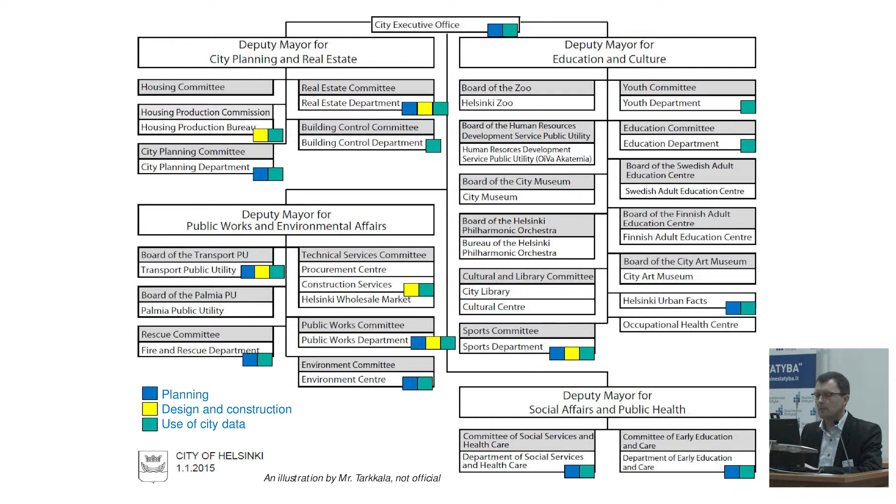The organization of the city is very complex. We do a lot of planning in several places. And as I am an engineer, I'm a purist when I talk about building information modeling, so it is not the same as city models. In the city planning department, we do planning and we use data in many ways, but design and construction are taken care of by different organizations.

We have main products, not only city planning, but also transport planning. I am not going to talk about transport planning today. The main product in city planning is the detailed city plan. Typically it is a CAD file that has structured information. Before it was only a CAD file and all the vital information was transferred manually, but nowadays there is a structure and a lot of information goes automatically.

Then we have master plans. We have several of them under work today. They are mapping files and they include information about the area density, the land use, number of residents and shops. But what will be approved by the city council is only the layout, the graphical illustration, in both these cases. So we have a lot of data, but only the visual content will be approved.

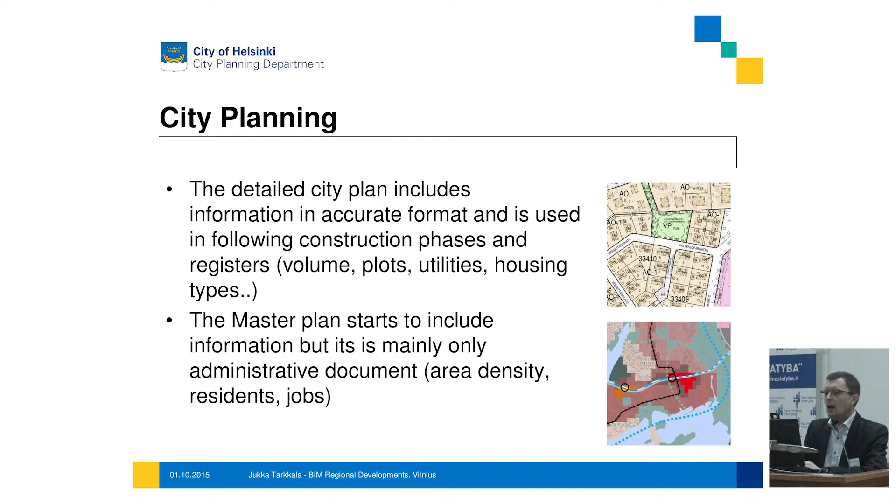Today, and say for the last 5 years or so, we have had a system that was provided by Bentley. It works on a ProjectWise environment. We call it common data environment. It is some kind of project bank. We have 300 active city planning projects going on at the moment.

And there is structured information. We use that also for the operation of the city planning department. We use reporting, and then we follow the budgeting, monitoring of the working hours and so on. But then there are also automatic connections to the national level registers. And then inside the city we have a municipal server for our civil servants, so we get very fast information on what's going on.

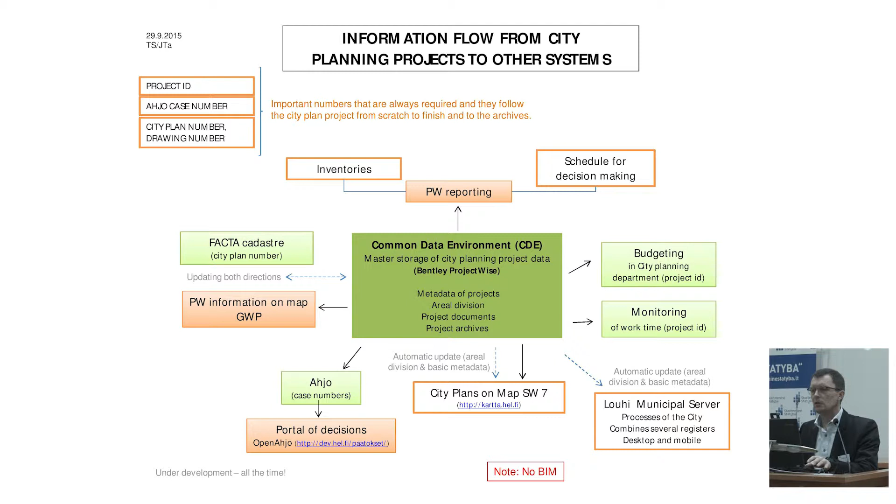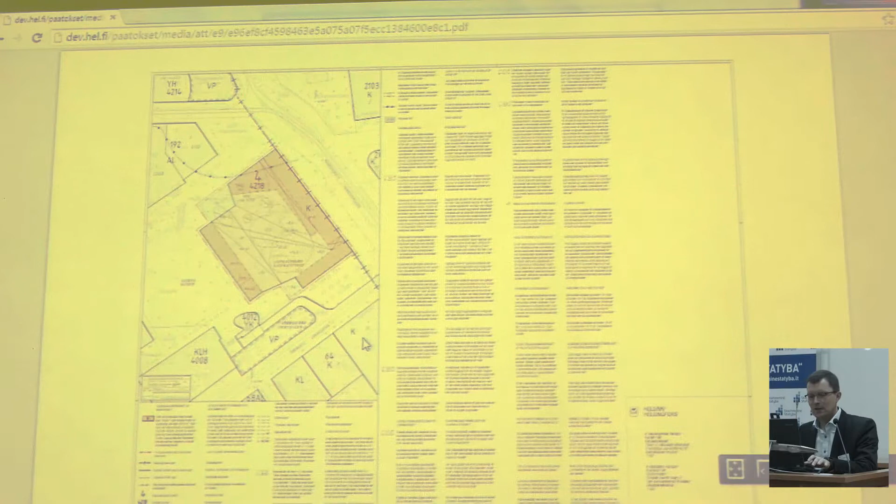But this is also because of the openness. This is also for the public. So this runs on the internet, and I'm sorry it is in Finnish, but for instance, if we take a look at which are the decisions. Oh, accidentally I found a very interesting plan. I will come to this later. But due to openness, this is important, and also what we are working on at the moment is visible to the public. In planning, we are preparing these city plans.

And then we have detailed master plans. But of course, we have a master plan revision for the whole of the city at the moment as well. But I wouldn't call this BIM. There are many ways to do work, and we have the stages of city planning here. We start from the left, and in the city planning department we take care of the material until it goes to city council.

After that there are other people taking care. And of course all the work is done with the computers, but the way of working is pretty old. So we transfer information manually to many places and many times. So there's a lot of databases, there is a lot of information, but it requires manual stages.

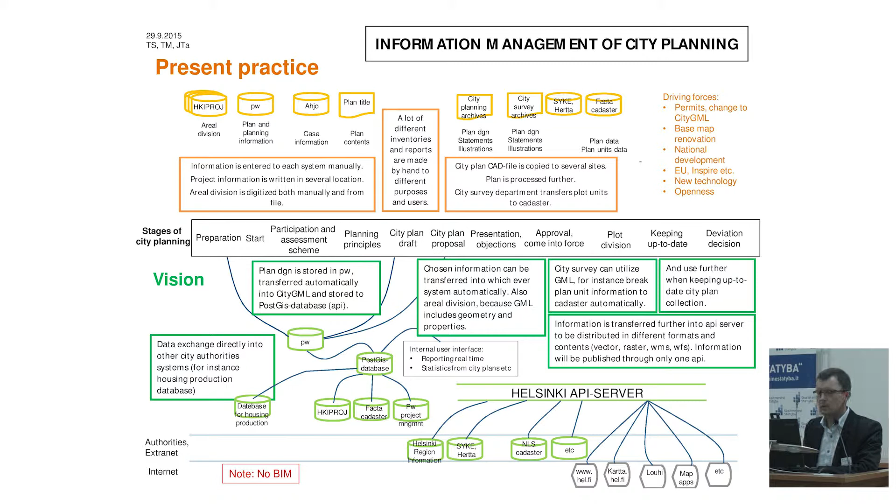But the vision that is very close is semi-automatic. So here we have that ProjectWise environment that I described here. And the work in the city will be based on that, and we can also exchange information through the application programming interface to different authorities and also to the public. So this is a good way of working, but of course it is not BIM.

But this is BIM. So this is an illustration that I made for this seminar of our city rail, of one part of our city rail loop plan. So the city plan is very simple. It's a two-dimensional CAD drawing. We have reservations. For instance, here is the present tunnel, and then there will be a new tunnel because there is a collision in here.

We have rough models of existing utility tunnels. In this there are 3, and this is an underground garage that is under construction now. We made that model a few years ago when the city plan was prepared there. And then we have this railway plan. There are some parts.

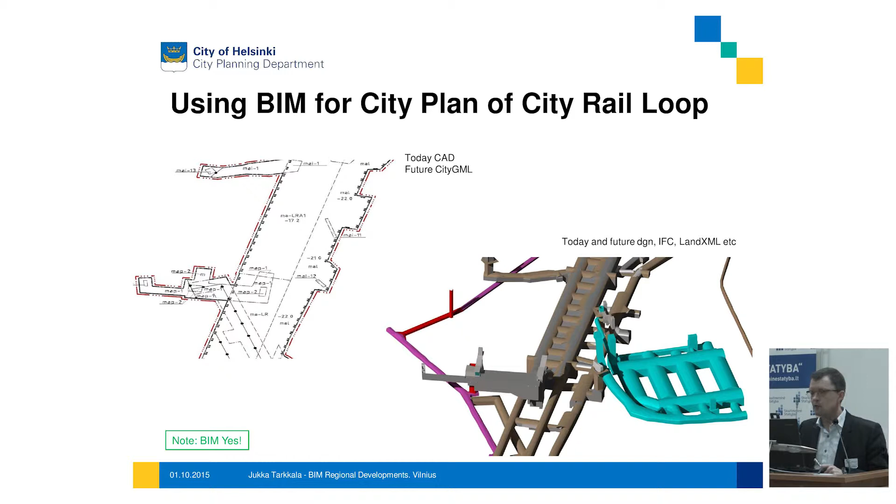So there is a collision in here. It is not a collision, we just combine the functions, and that must be done precisely. And this is BIM. But there are only a few city planning projects where we use BIM, full BIM, at the moment.

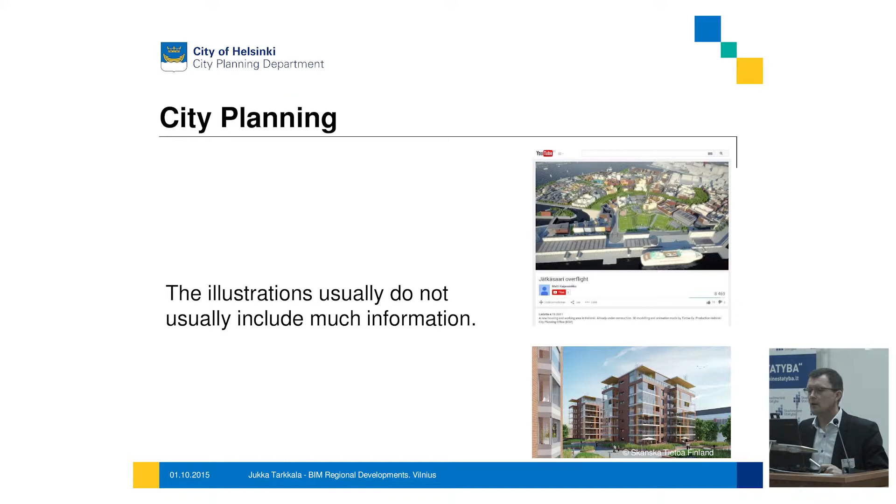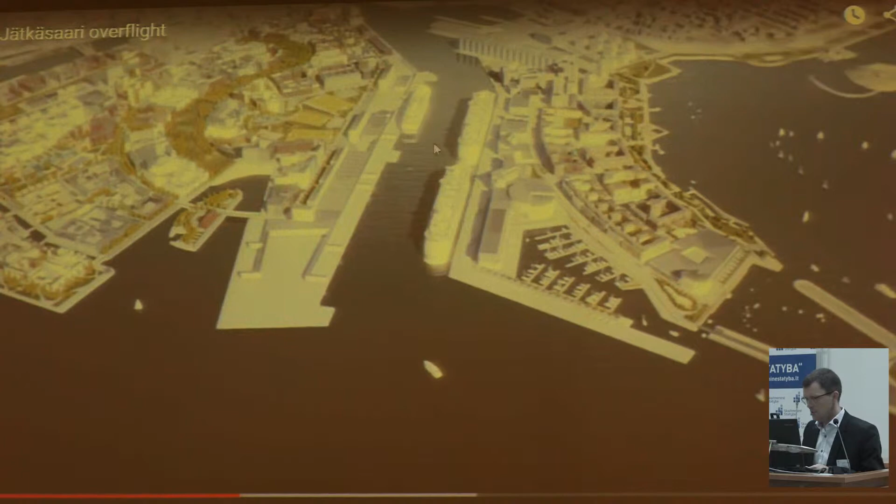The illustrations that we produce normally, they don't include very much information. These are done for the decision making. They show what is the layout of the city plan, which are the functions. And for instance here we have a large passenger harbor. This area is under development now, and this is an old storage and harbor area that will be developed later, but in the near future.

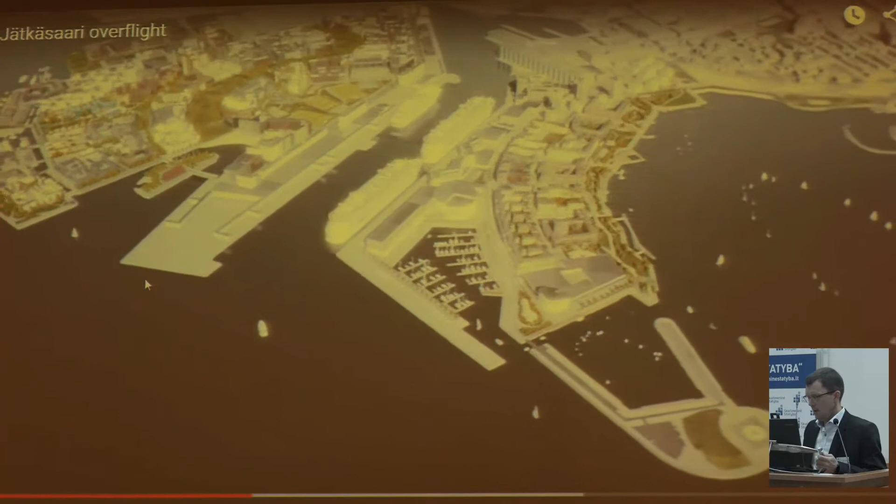So this is also a problem. We have great projects, but how to update? We have already constructed, say, 20 new buildings in this area. How to update that data to the city information?

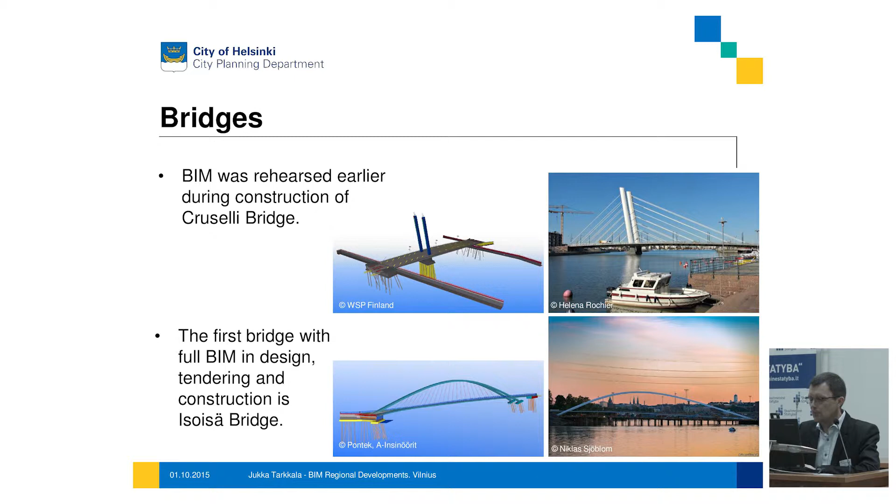Of course, these are the typical uses of BIM. So the bridge above, it has been open for 4 years now. There was a rehearsal of using BIM in the construction, but later this year they will open the lower bridge. That is a grandfather's bridge, and that is the first large bridge with full BIM from beginning to the end. And of course, the major renovation projects in the buildings that are owned by the city are done with BIM.

And the renovation of the Olympic Stadium and extension of the spaces will start in a few months. I hope there is new room for basketball also.

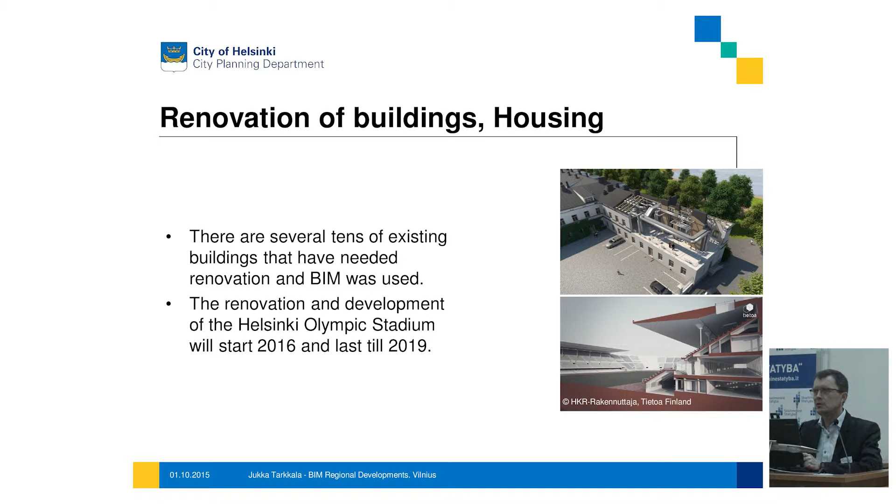But as you know, it is not only the visual appearance of the city that is important. We must combine a lot of information there. So the platform must be multi-purpose. So we can join cadastre and data about the population and jobs and traffic and so on there. So the work is going on at the moment. There are pilots. I don't know which they will be, but I will hear about them very soon.

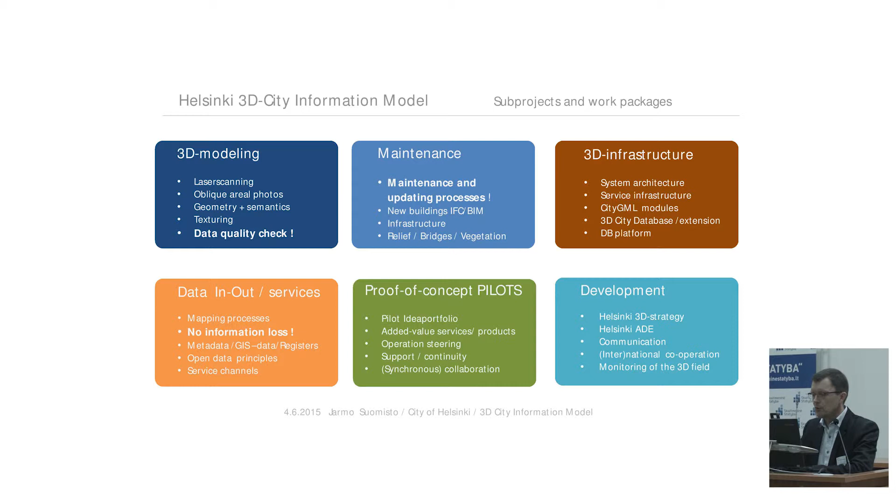And the work packages that are included in this development can be divided into these 6 boxes. There is nothing new in these. We have all noticed these lines before. It is only how do we combine these into one format so that we don't have separate projects, but we have them together supporting the functions of the city.

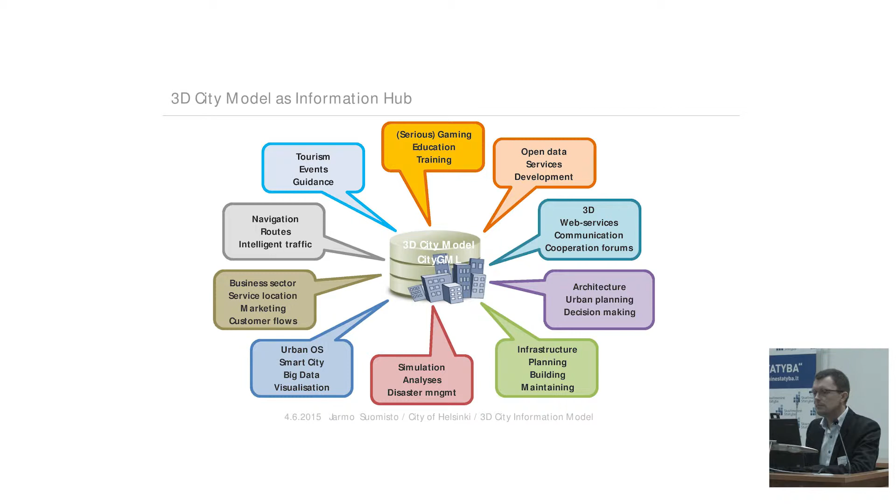Here are our normal everyday activities. But as you can see, this city model planning work. So at the moment we have a terminal railway station in Helsinki, and then we have another existing station here, and all the railway traffic to Helsinki goes through these. We have designed the loop with 3 new underground stations.

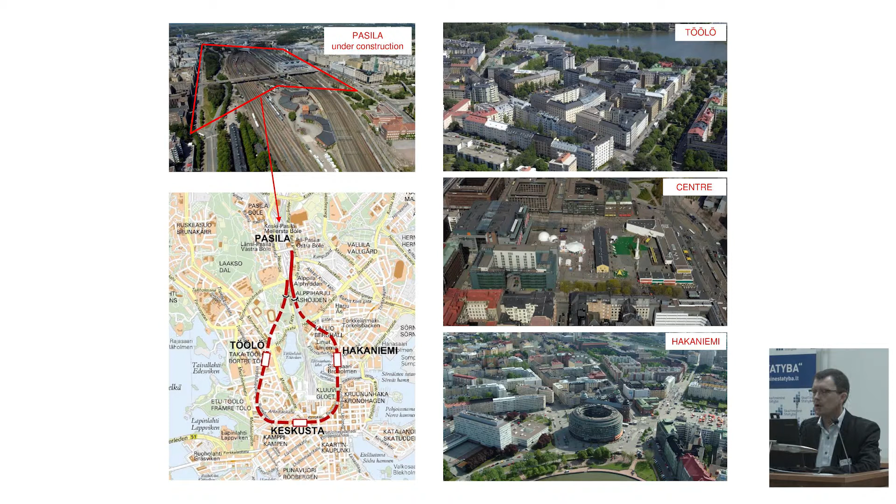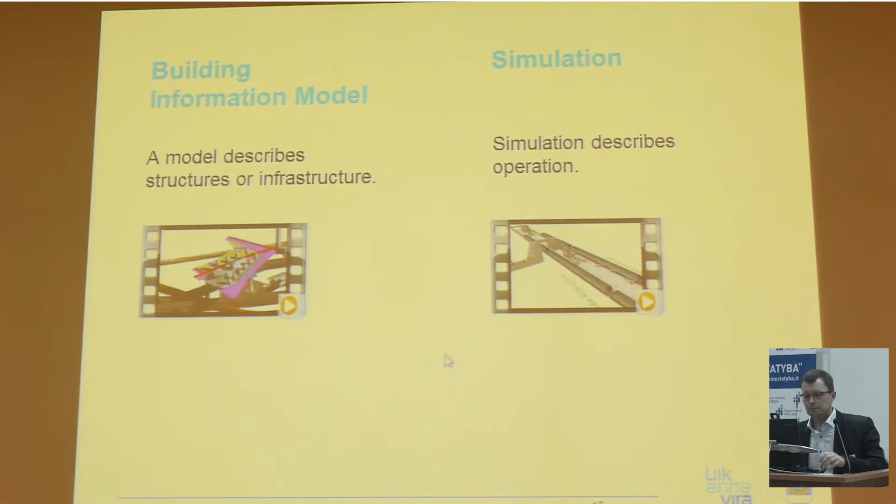Here at the Pasila area, the construction is going on at the moment. A few days ago it was like that, but here the stations will be underground and not visible. So we have done a lot of information modeling, for instance, for the entrances. And then we have done a lot of simulations, for instance, for passenger and pedestrian analysis.

Initial data model, that is the city model of today. We have all these in computers, in files. They are in several sources, a lot of information that we have combined for this project into one database. So normally we have a lot of databases in use, but for everyday practice we have to simplify it.

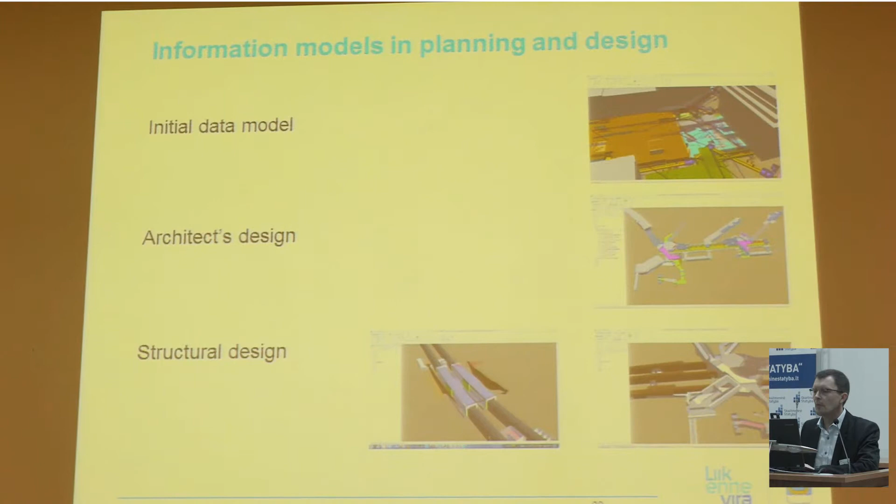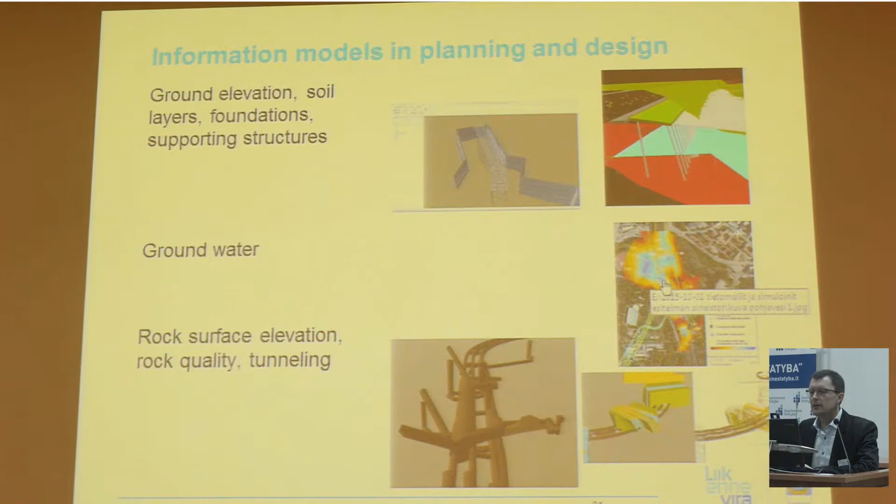This is the existing metro, existing underground spaces here, sewage tunnels, cables, and so on. We have this empty plot here for the railway station. During the design, we have made models of temporary structures also. This is the empty plot that I showed a moment ago. We have to decide in advance what is the structure, and then we have to decide in which stages we are going to construct it.

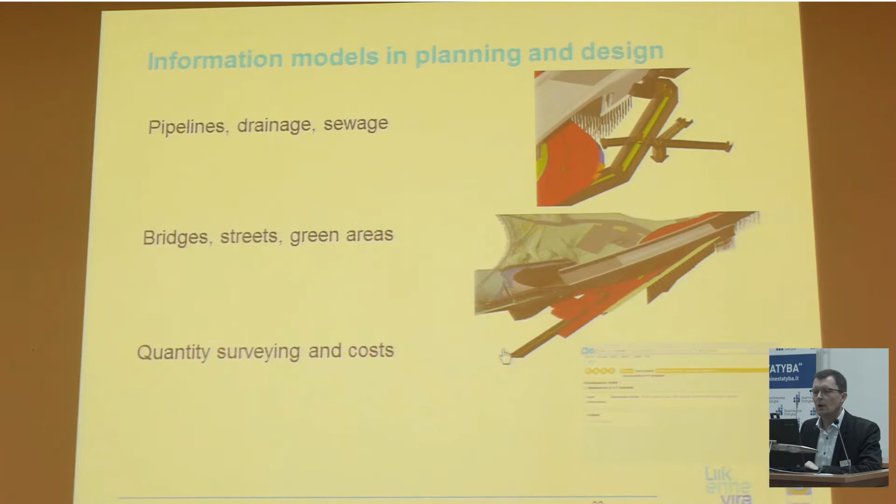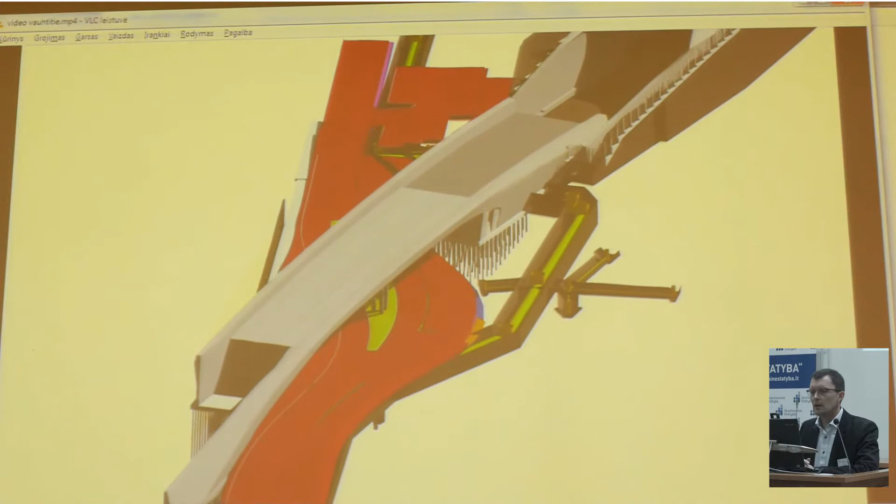So there is a temporary tram bridge. And also we have one major overground bridge. It's here. Then we have several underground bridges in the tunnels. The space that is needed for ventilation, smoke exhausters, and that kind of technique, it's immense.

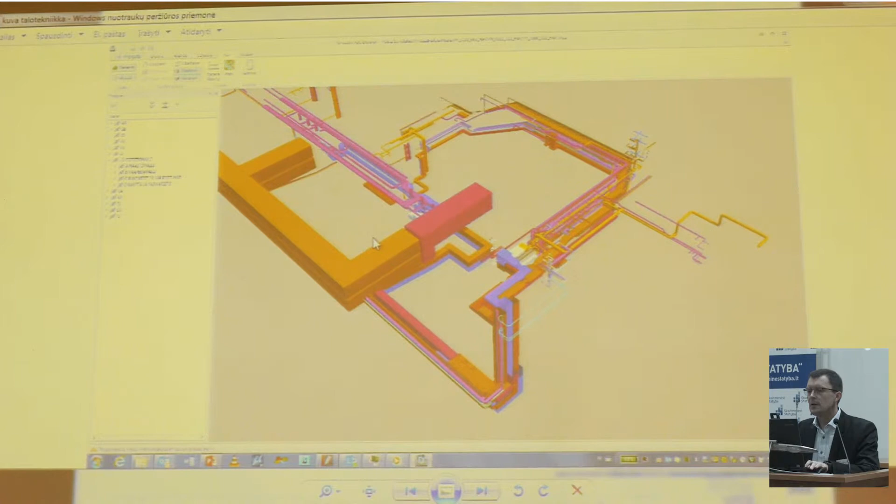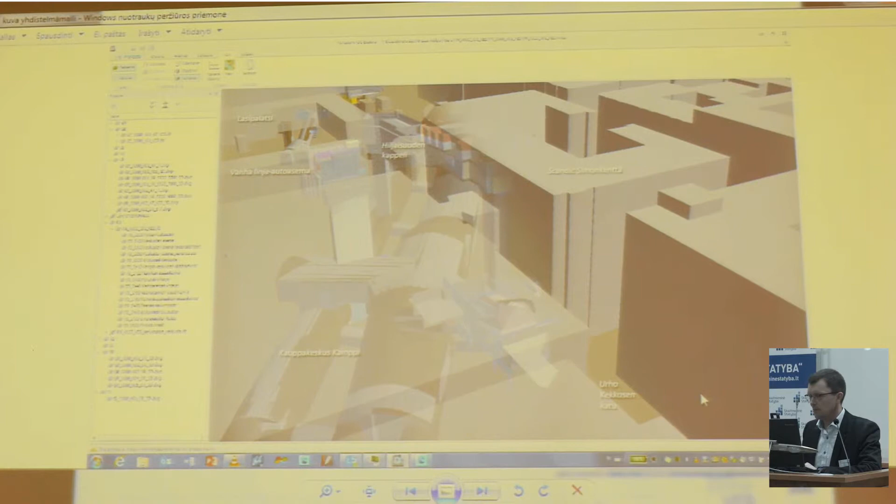And after all this modeling, the combination model, it is very heavy, it is large, it's too complicated. That is a problem. If you have a large project, then you have too much information for a single person. So BIM gives very good support to that. You can use only that information that you need.

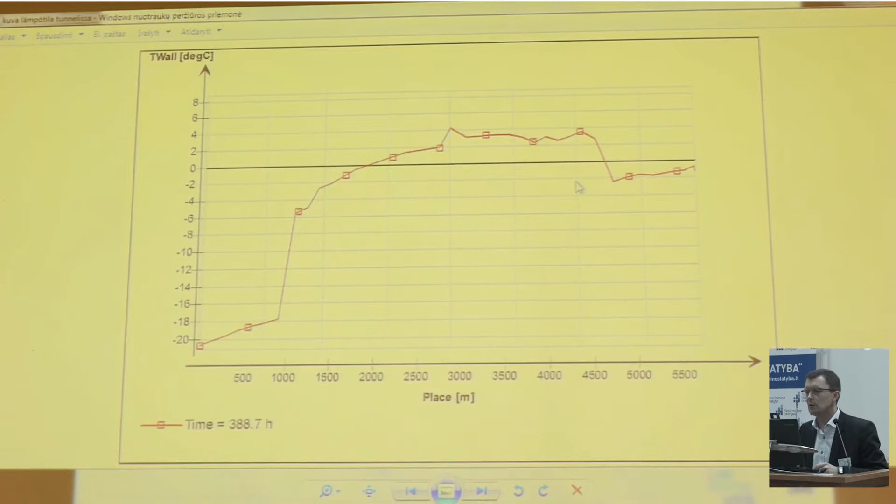Of course, the simulations, there's a lot of them. For instance, in Finland, it can easily be -20 or -25 degrees outside in Helsinki. So the cold air goes to the tunnel and the train pushes it forward. So for 2 kilometers the tunnel walls will be freezing. But in the middle of this 6 kilometer long tunnel, it will always be in the plus degrees.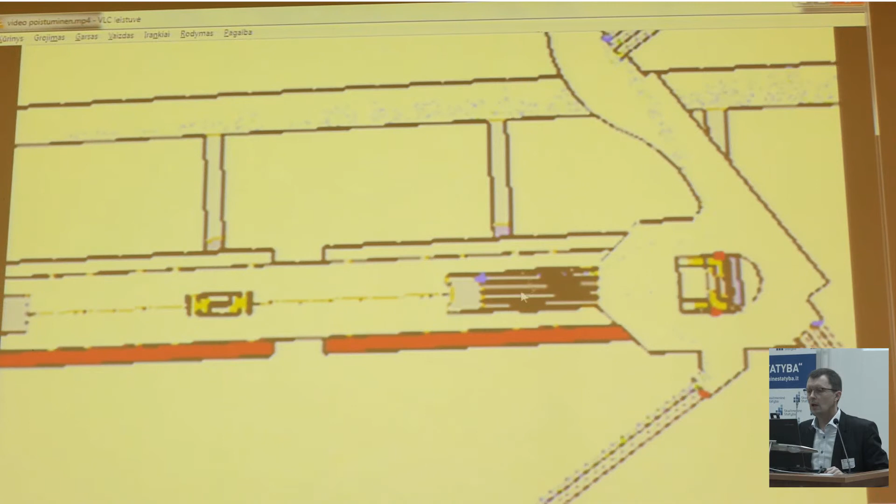So I already showed the pedestrian simulation, but there are also, if there is an emergency in a train, for instance here in the red train, the passengers from the station are safe in 3 minutes, and in 10 minutes the whole station is empty. So there is a rescue and service tunnel besides the railway tunnels, and the entrances can also be for rescue purposes.

This is the most important slide for me, because the population and the number of jobs in the Helsinki region is increasing. So which will be the number of passengers in the trains that are red and in the metro lines that are yellow. It describes only the public transport. There are also tram lines and then the bus lines here. But as you see, railways are the most important ways for public transport.

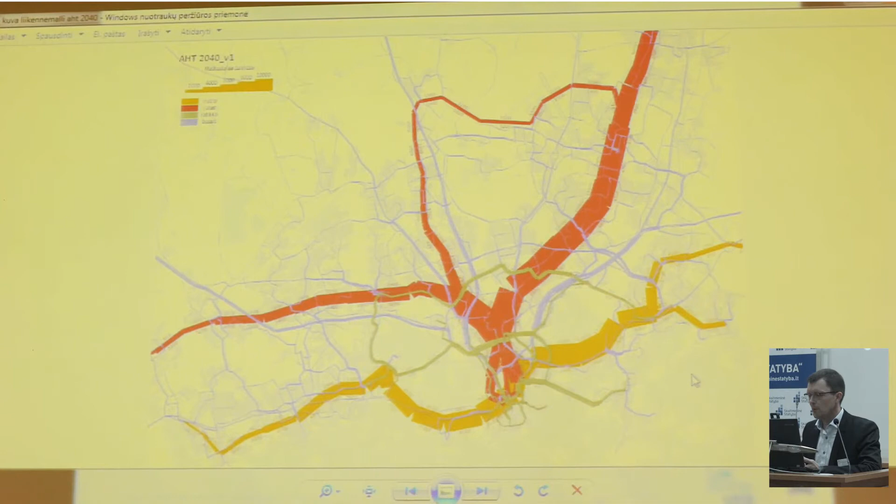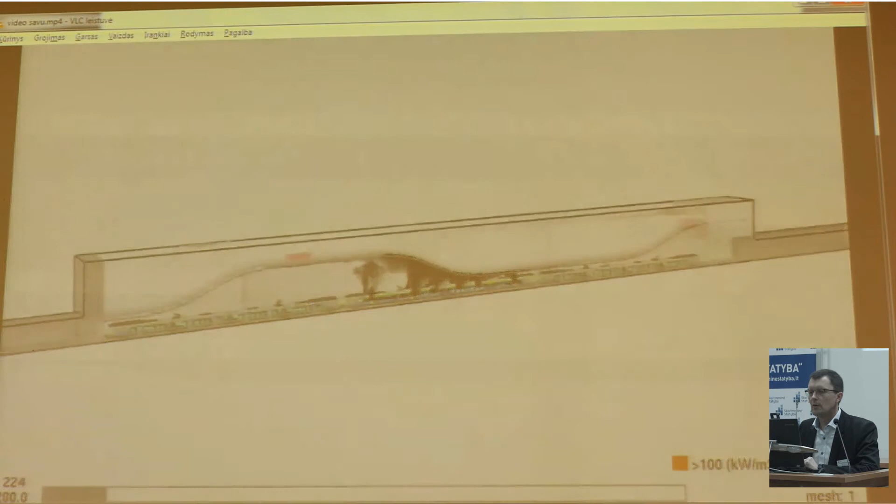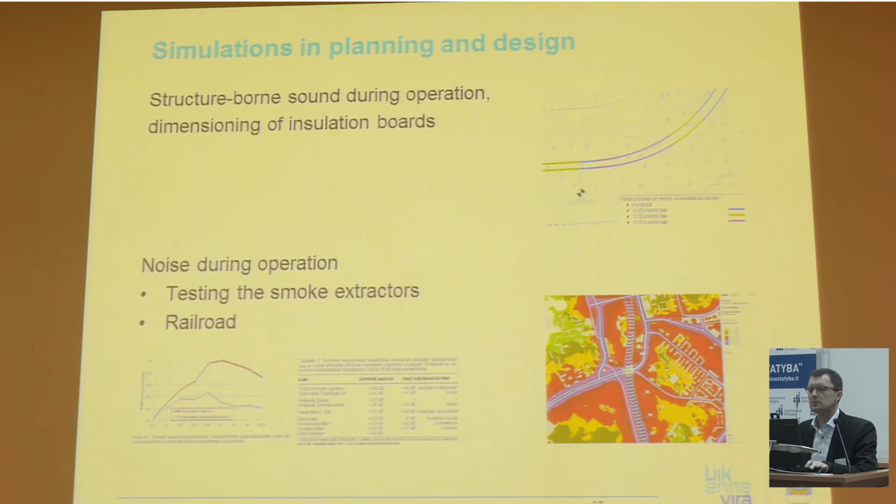About the simulations more, so if there is a fire in a train, in a tunnel that is at the station, what happens to the smoke? And when we are below existing buildings, what is the structure-borne sound during the operation of the trains? What is the dimensioning of the insulation boards below the tracks? And then many other aspects.

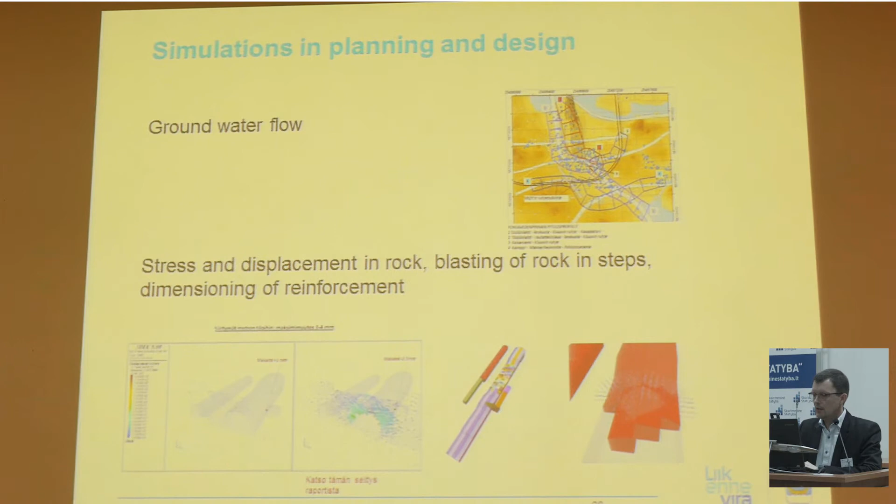We have a design and planning office at the center of Helsinki, but unfortunately we have to move because they are starting to construct a new museum. And the city plan that I showed you accidentally in the beginning is the city plan for this museum that will replace these operations. So this building will be there also in the future, but the museum will be underground here, and these operations will be changed for the museum operations.

We are 2 project managers. I have been in charge of city planning, and my colleague, Mr. Jussi Lindberg, he has been in charge of railway engineering. So if there is a railway project in the Baltic countries in the near future, you can contact Mr. Lindberg for advice.

And there have been a lot of companies and maximum 300 people involved in this planning and design. And there are tens of different computer programs that have been used for building information modeling and simulations. So for sure we need to have open data, we have to have open data exchange formats, and the most important of all, we have to have open ways to work together to exchange information.